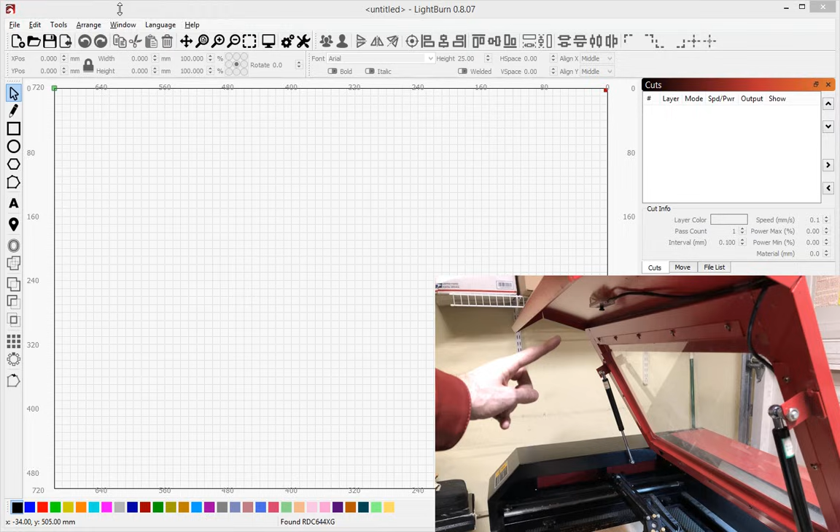So once you have a camera set up, connected, I have mine mounted on the inside of my laser, and I'll show a picture of that here. Go to Window and enable the camera control window, and you'll see it here. This is where it shows up by default, in behind your cut list. You can move this, that's fine.

If you click on camera here, you should be able to find the camera that you've mounted. Mine is called E2 camera. I'm going to pull this window out just to make this a little bit bigger so you can see it. This camera view is actually live right now. I can move my hand around underneath it.

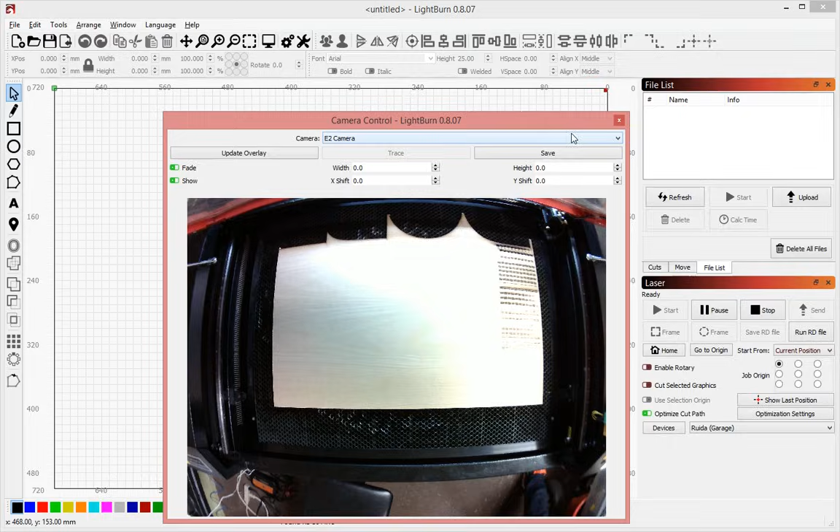So in order to get LightBurn to take this picture, which is fairly heavily fisheyed, and turn it into something useful, we have to do what's called lens calibration and alignment calibration. And those are the two things we're going to do next. So go to Tools, pick Calibrate Camera Lens, and you'll be presented with this window. Choose your camera, and you should see the view here.

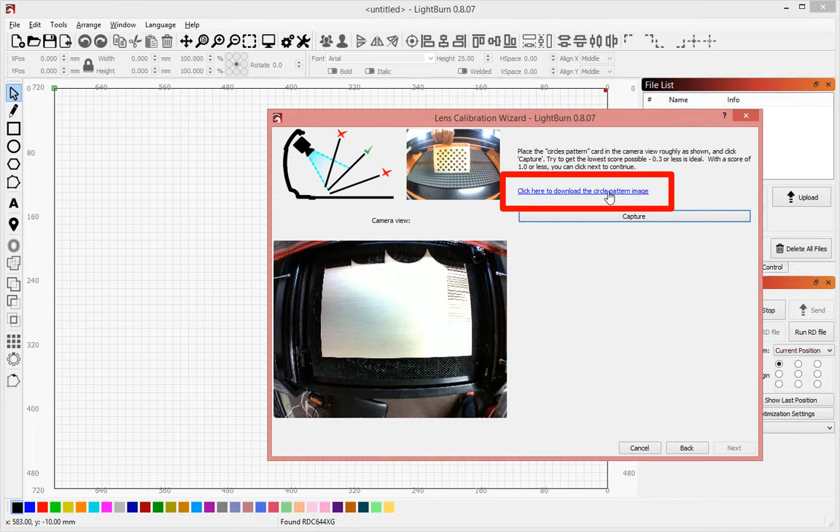This page is where we do the lens calibration, and you'll see a link here that says click here to download the circle pattern image. Now what this is talking about is this. This pattern is what LightBurn uses to measure the distortion of the lens of the camera.

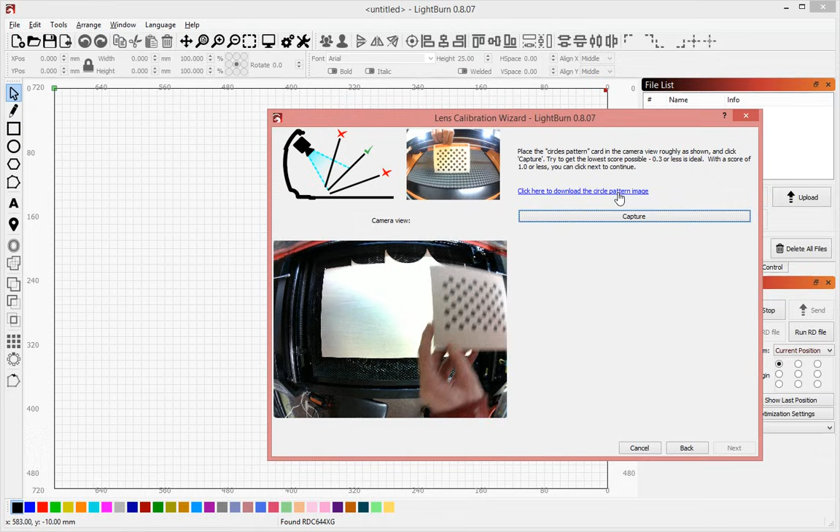And so you can see as I get close to the sides here, this warps a little bit. It looks pretty good in the middle, but on the edges you can see that the camera that I have right now is fairly heavily fisheyed. Some are worse. This is only a 140 degree lens. A 160, 170, or 180 are considerably worse, and they're going to be harder to calibrate, but it's still possible.

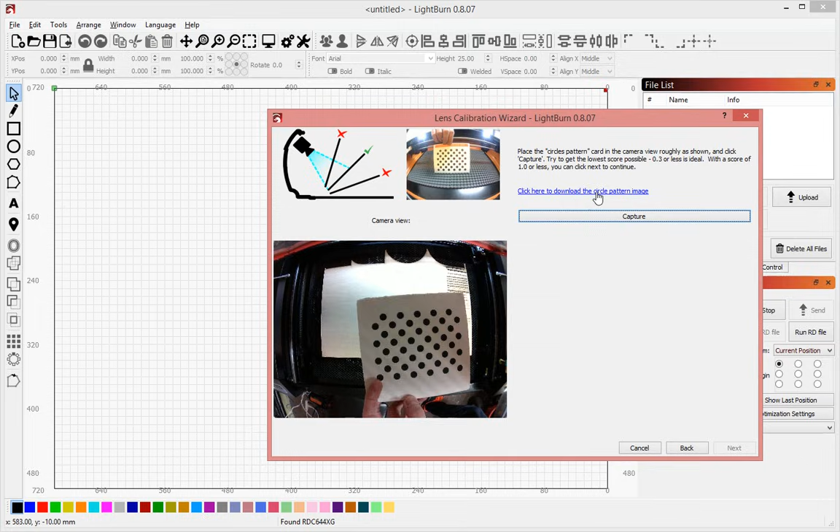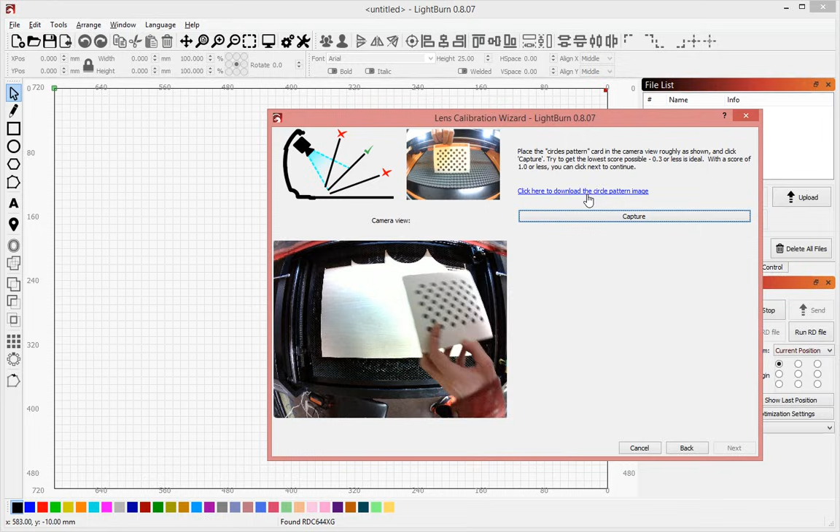With this card, you print it out at the size that the image is originally, so it works out to about 1/4 of a standard sheet of letter paper. I have this mounted on foam board, which is styrofoam core with paper on either side. You want this to be as absolutely flat as you possibly can. So I've just used glue stick to attach this to foam board. The flatter this is, the better your results.

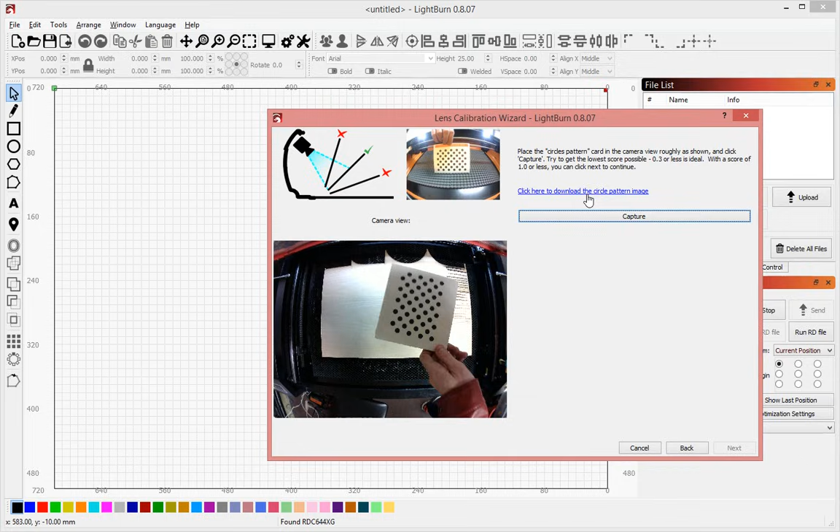If you have this image curved somewhat like this, instead of being nice and flat like this, the code in LightBurn that is trying to compensate for the distortion of the lens in the camera will instead be compensating for the distortion of your paper, and you don't want that. It's going to affect your results. So, short version, make sure that this is as flat as you can get it.

All right. The next part is up here in this window. You see this green checkmark, showing you that you should make sure that the card is absolutely facing the camera, not at an angle. So what that means is you want this card to directly face the camera, not be tilted slightly off to one side or the other, tilted away. You want it to directly face the camera.

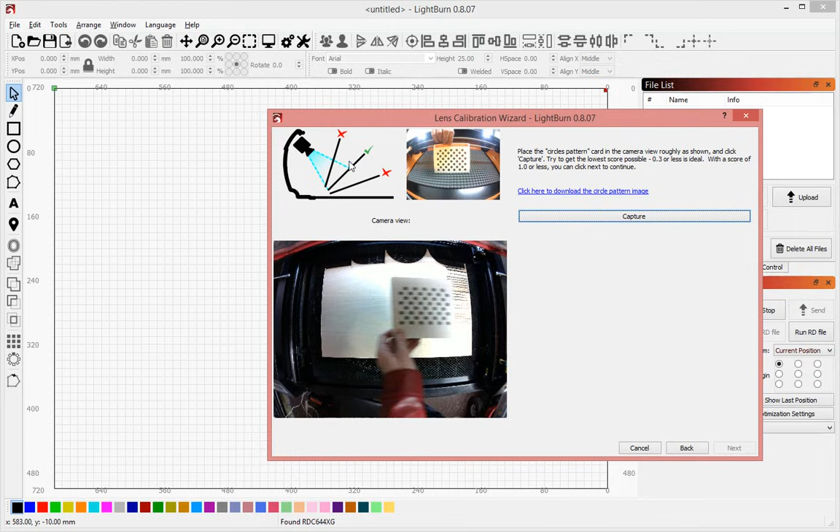And you want it to stay facing the camera as you move the image around. So you don't move the image in a circle like this around the camera. You move the image like this relative to the camera.

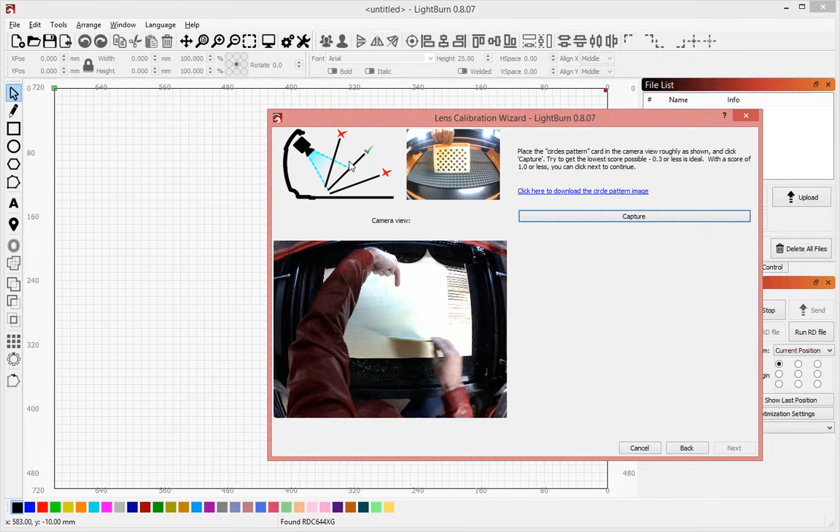So if the camera was over here looking this way, I would move this card back and forth like this. That's important. You want this card to point as flat at the camera as possible. You can angle it a little bit if that helps, and there are cases where it might, but again, as flat as possible is good. So let's get started.

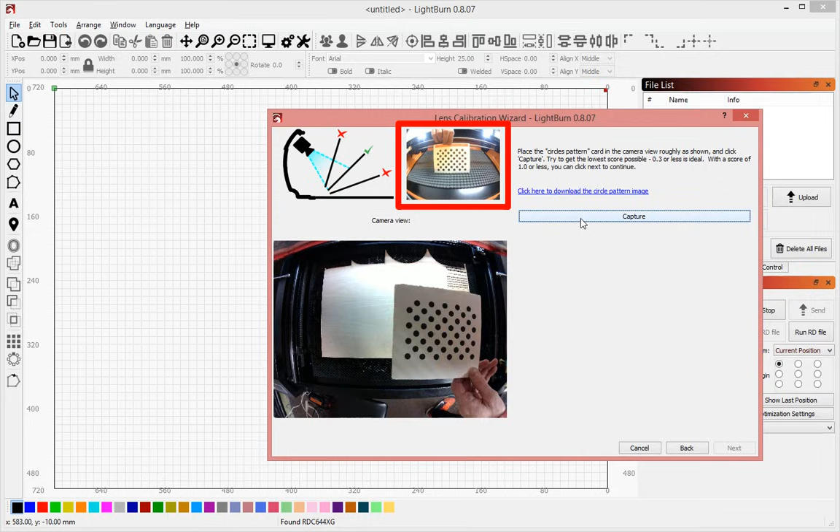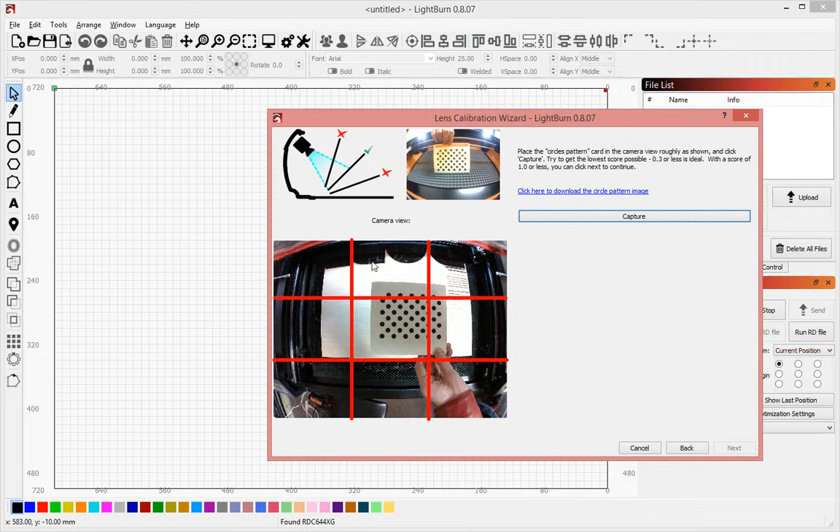This little view here shows you the ideal position for the card for this particular calibration image that we're taking. You're going to take 9 captures maximum. You can actually get away with doing fewer, and we'll talk about that when we get there. This image is showing you which capture LightBurn wants you to take. And basically what you're doing is putting the card so that it occupies roughly 1 square of a tic-tac-toe board, and you're going to do all 9 squares, if that makes sense.

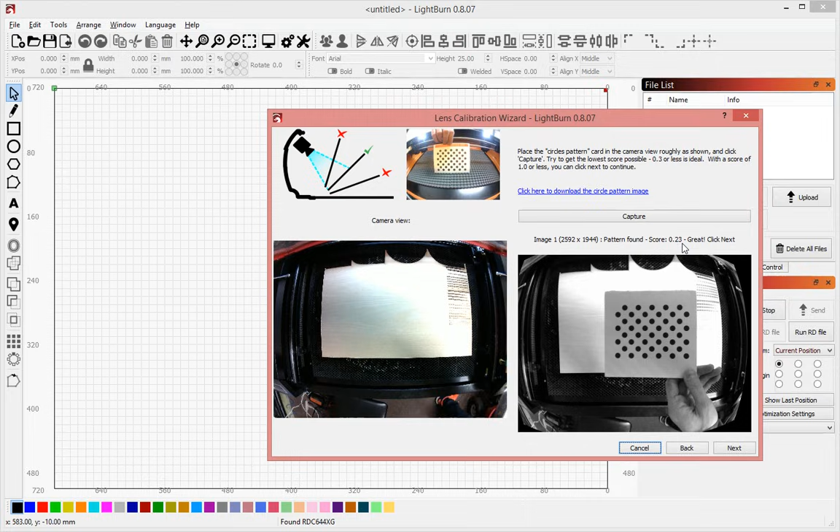So, hold the card as still as you can. If you can rest it on something, that's even better. Fill approximately the space that it looks like it's asking you for there, and hit capture. And you'll see pattern found and a score. Now this score, you should be trying to get it as low as you possibly can. It is possible to get numbers that are 0.06, 0.05. It's not easy, but it's doable.

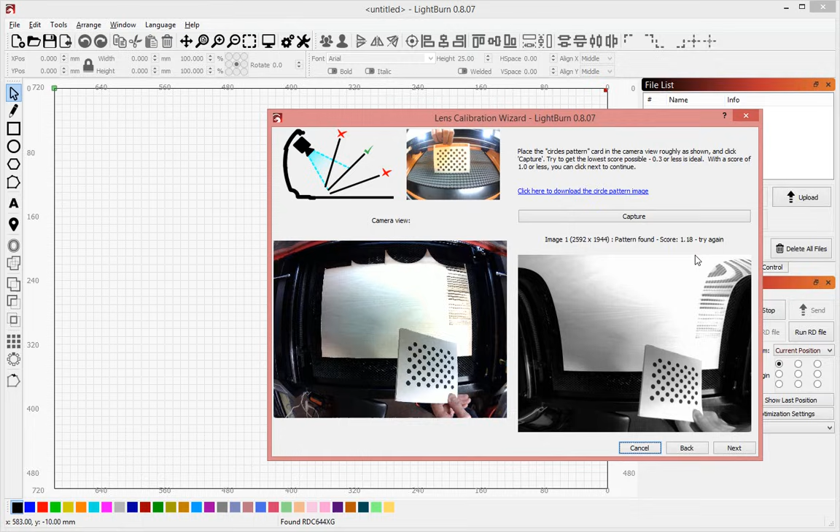And you'll see you can recapture here. There's 0.12, that's actually pretty good. If I tilt this funny, hold it a little weird, you see that number goes up quite a bit. If it's really crap and off the boundary here, you'll see, hey, I found the pattern, but it gives me a pretty bad score. So hold it where it's asking, hold it as still as you can. That one's not bad. Lighting is also important, and my lighting here is kind of crap, and I apologize for that. There we go. So 0.13, that's great.

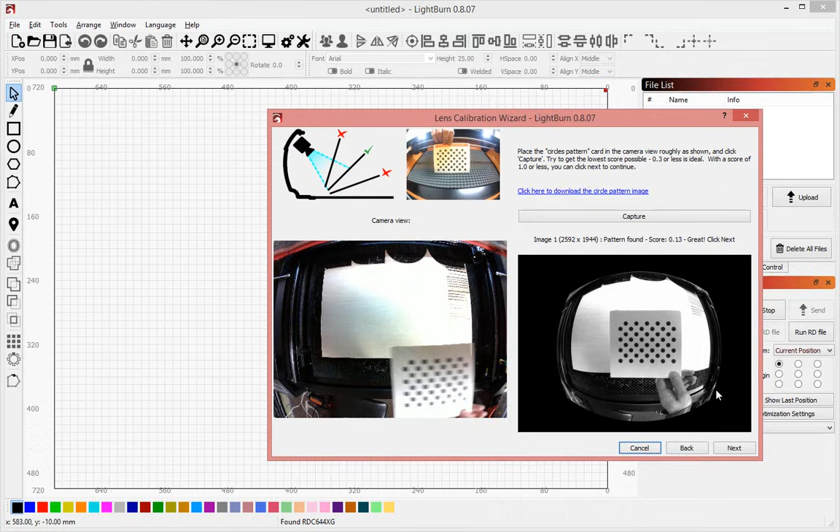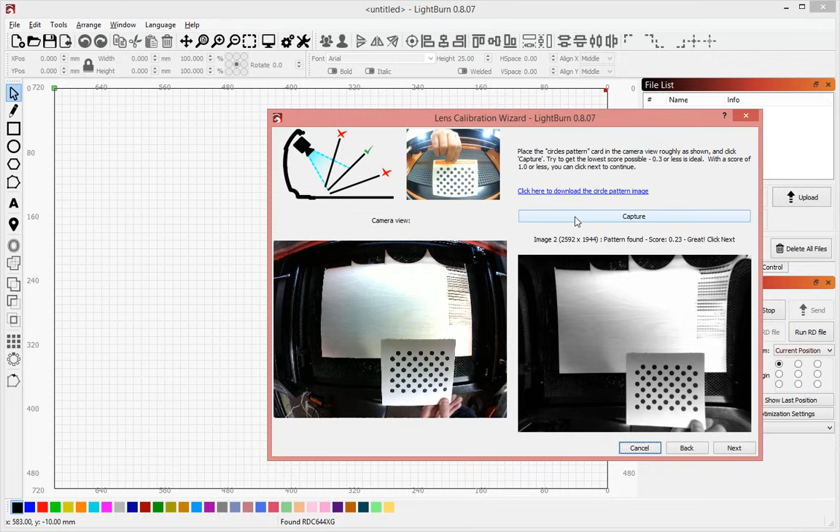So click next. Now it's saying bottom edge. So we're going to do basically the same thing that we did before. Hold the card nice and flat, roughly the size that it looks in that picture, and hit capture. 0.23 is actually not a bad score. I'm going to try and get it a little lower. You can also move the image around a little bit within the frame. Sometimes that helps. 0.16, I'm pretty happy with that, so we'll click next.

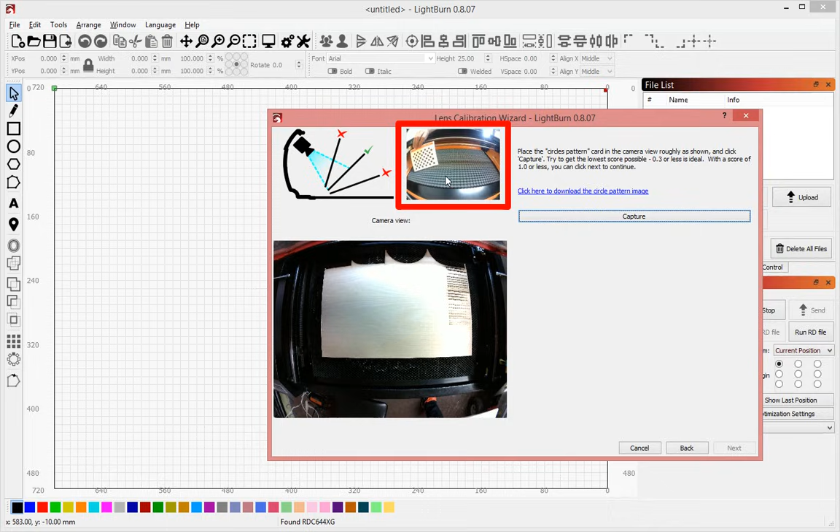This one, don't let the image fool you. The picture in this is quite distorted because this sample image was from a 160 or 170 degree lens, but really what LightBurn is asking for is this picture over here. It's not bad. I think we can do better. I'm reasonably happy with that. We'll move on to the next one.

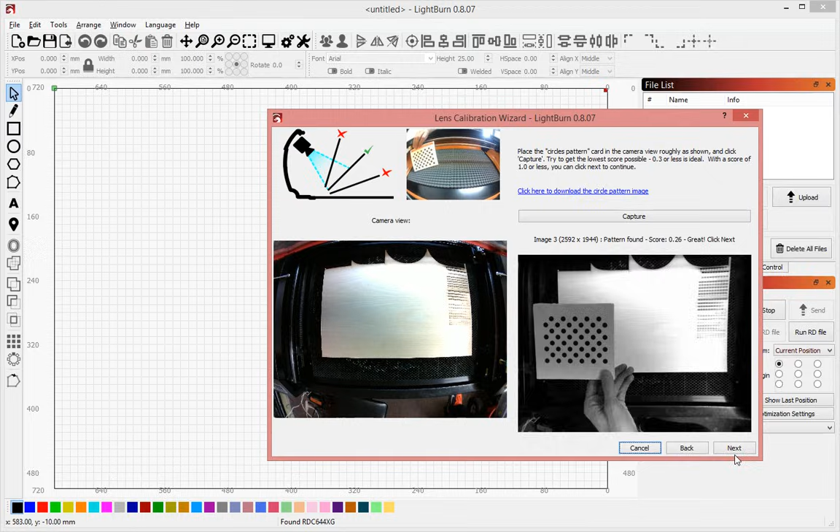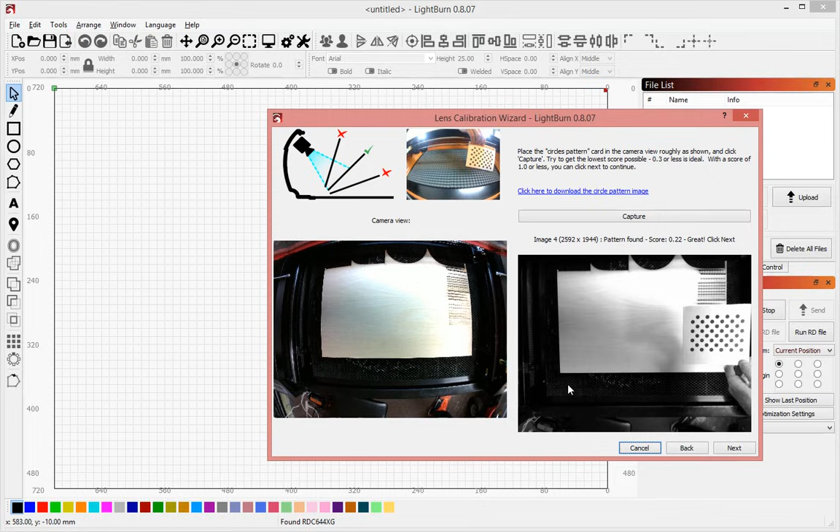On the next side, lighting over here is a little better, so this one might improve. That's pretty good. When you take your first capture, you might have noticed that when I did it, the image here looked really weird and round and warped. Don't worry about it, it corrects as you go. So this one up here, that's a great score, so I'm happy with that.

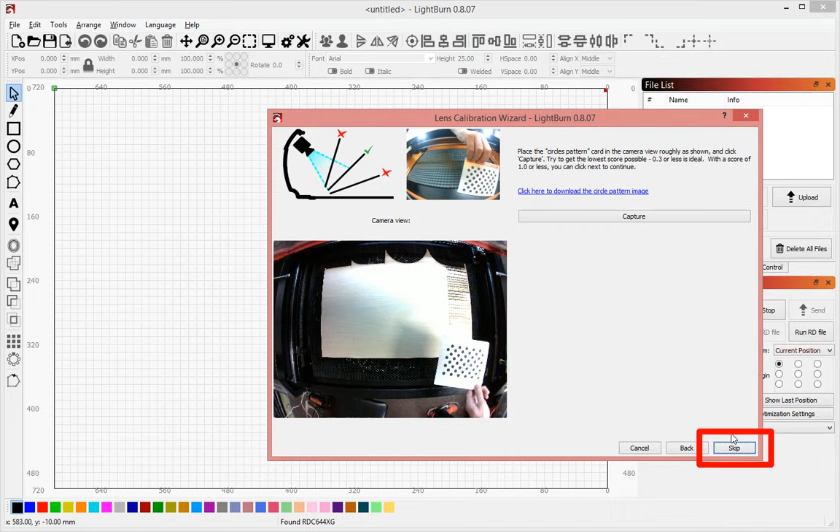Now, because I have done well and gotten good scores for the captures up to this point, for the center, the bottom and top, and the 2 sides, I have the option to skip the 4 corners because my captures have been really good. So I can either click the skip button, or I can go through and capture images for these ones as well. I'm going to do at least one. 0.21, that's a good one.

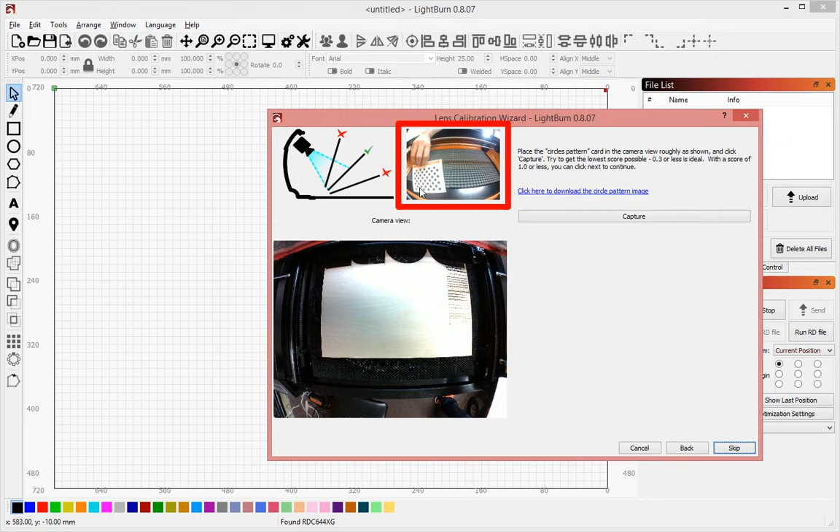Click next. It's also worth noting that LightBurn doesn't check which picture you gave it. So I just did the corner down here. I'm going to skip this one and go to the next one over here. And you'll notice it's asking me for this bottom corner. I'm just going to do this one up here. That's great. I can click next, and I'm going to skip the next 2.

So we've done the camera lens calibration, and now the next step is the camera alignment. Now for that, you need a piece of material. I have a fairly crappy piece of wood that I've placed in my machine, roughly centered in the view of the camera.

If you have a large bed, try to get a piece of material that is large enough to cover a fairly wide area. The default for this test pattern cut is, as you'll see here, 200 millimeters square, or an 8-inch square. That's great if you have a little K40 or something like that, but if you have a large machine, you should use the scale factor here to scale this image up to fill more of your bed, because it'll give you better accuracy. It'll give you a much better result. So I am going to bump this up to 170.

If you have a movable Z, you may want to set the material thickness. This will shift the bed a little bit. Most of the time you don't need to do this. Choose an appropriate speed and power for the machine that you're using. This is going to do essentially a surface engraving, and so I want to use a fairly low power and a relatively high speed because I have a 100 watt CO2 machine. Your numbers will be different than mine. I'm also going to enable air assist.

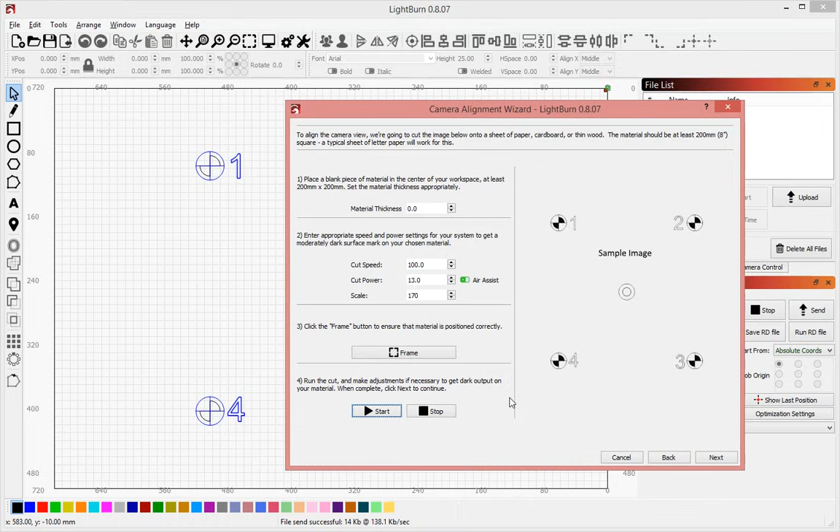So once you've done your cut and you're happy with the result, be very careful. Do not move either the camera or the targets from this point on. Your camera should be mounted to the laser in such a way that the position when you are using the camera for bed capture is always in the same place. If your lid wobbles or doesn't have hard stops, that may be a problem. It will cause your camera position to shift slightly, and that's going to affect the accuracy of your results, so do be aware of that. I'm happy with the output here, so I click next.

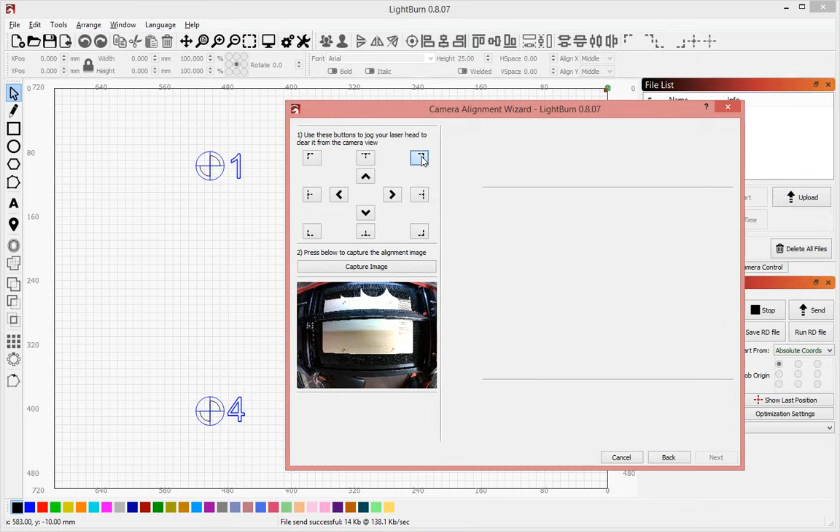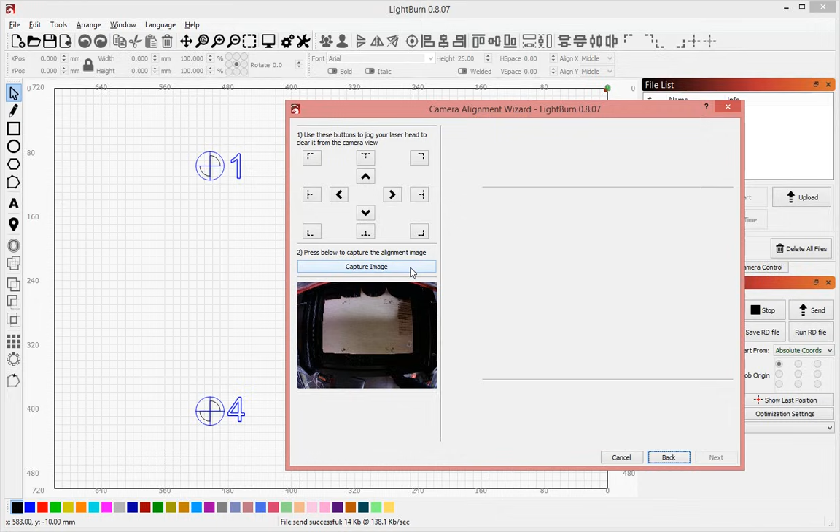Now you can see a crappy picture of the bed here. If you need to move the head of your laser out of the way, for example, if mine finished here, that's going to make it difficult for me to mark the targets, so you can use these buttons to jog or move your laser to one of the corners. When you're happy with the image that you see here, click capture and you'll see a preview of it over here. I'm happy with this, I'll click next. So now I'm going to use this view to mark these targets, and you can see that they are numbered. The lighting here is a little terrible, so I may need to do this again. That's much better.

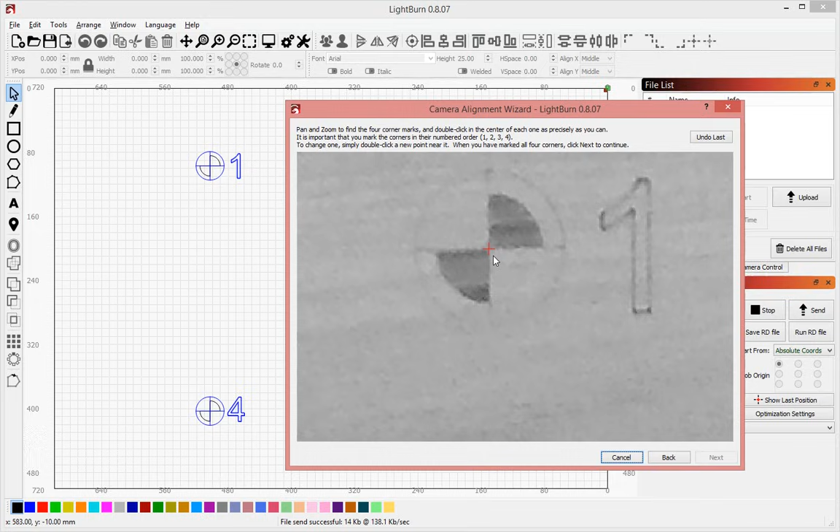So what you're doing in this view is, just like the preview in LightBurn, you can use click to drag or mouse wheel to zoom in and out. You want to mark these targets with a little crosshair. So you're telling LightBurn where each of these marks is in the camera view in numbered order. So be as accurate as you can be. You want to hit as close to dead center as you absolutely can on each of these marks. And you can zoom out to check. So that one's good.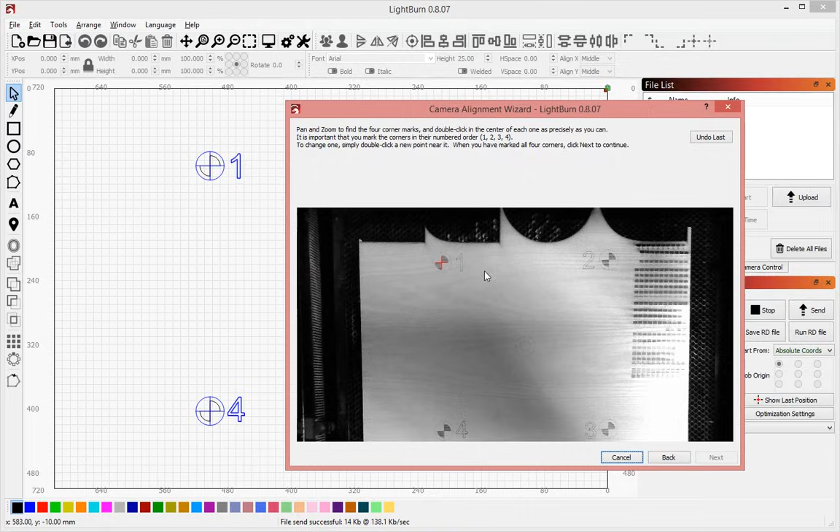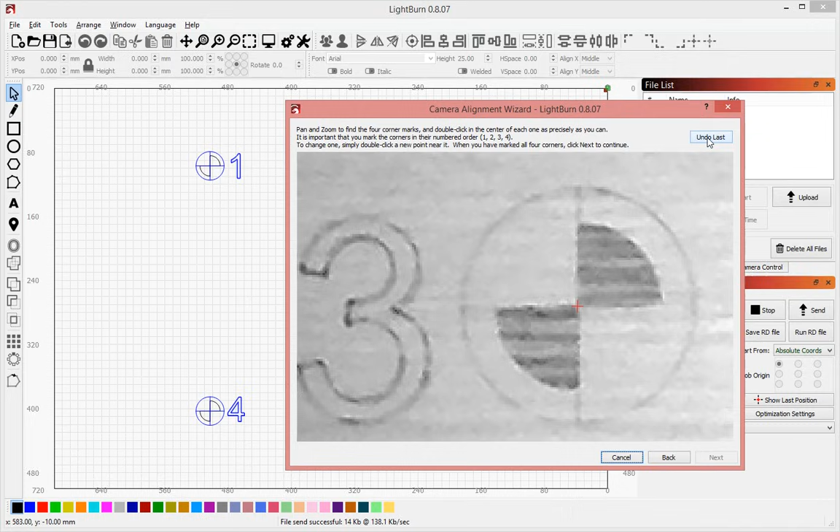And again, be careful and take your time, because the more accurate you do this, the better your results are going to be when you are trying to use the camera. If you need to reposition a mark, if you're close to it already, double-clicking near it will move that mark. And if you really mess up, you can just click undo last and it will remove the mark completely.

I think those are about as good as I'm going to get. Maybe move that one just a touch. When you're happy with your 4 marks, click Next and click Finish.

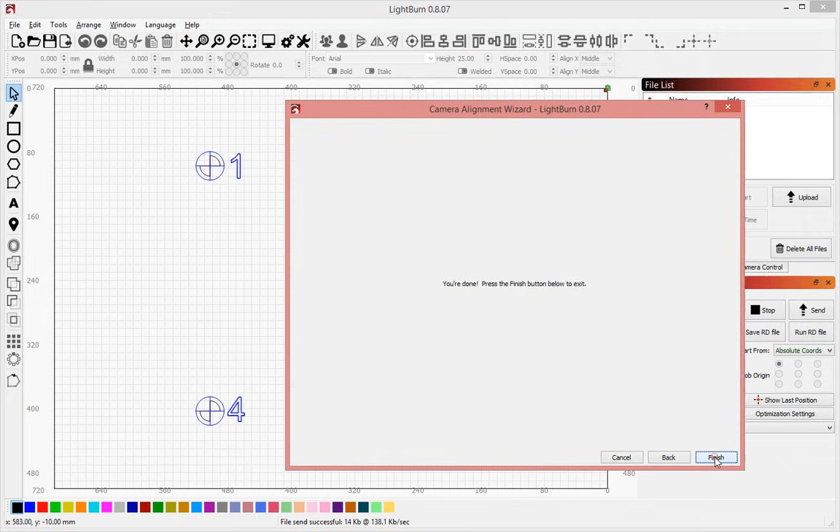If you go back now to the camera control view, so I have done the lens calibration, I've done the camera alignment. If I click Update Overlay, I now see an image from the camera projected onto the backdrop of my page here. And these marks are accurate, or should be.

If I click the click to jog and zoom in here to marker number 1 and move my laser head to there, you can see in this view the laser moved to that marker. If I look at my laser right now, or take a picture of it, the laser head is exactly in the center of that mark.

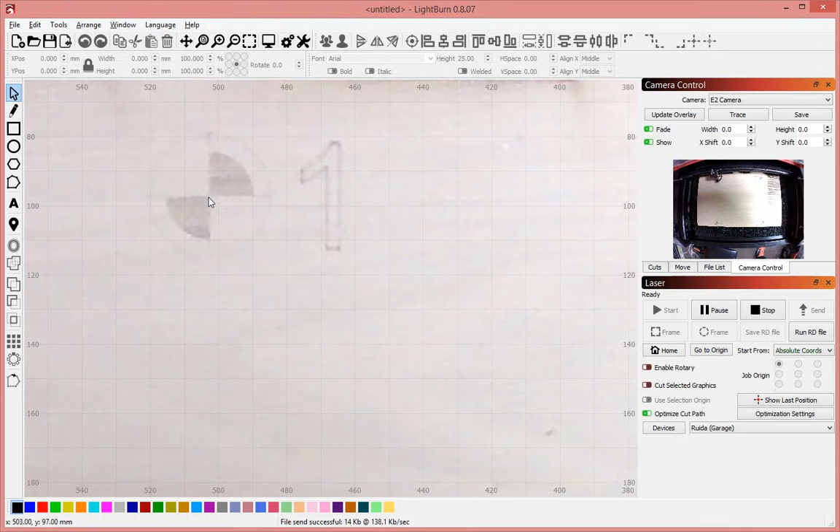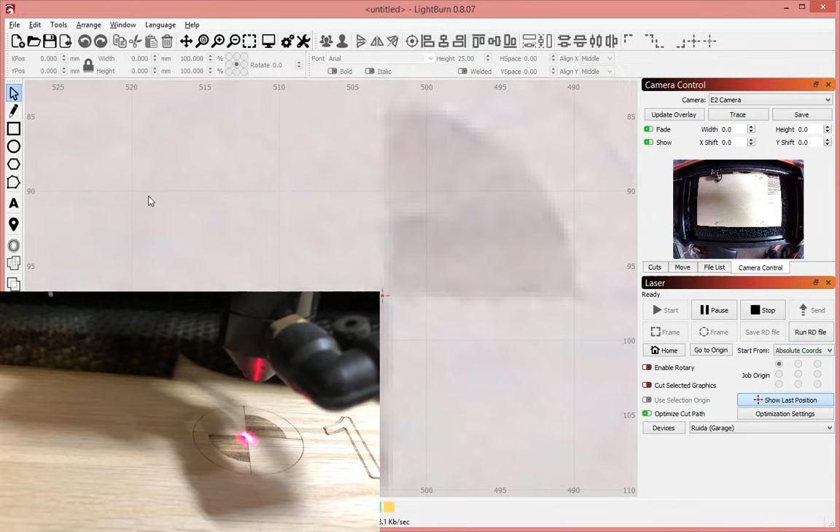So if I click show last position, let's move this to right. Okay, that's as close as it's going to get just because I've told it to snap 2 millimeters. I am going to take a picture of this right now to show you where my laser is pointing. So you'll be able to see it. Again, if I click one of the other targets, like number 3, it's basically perfect. So that's good.

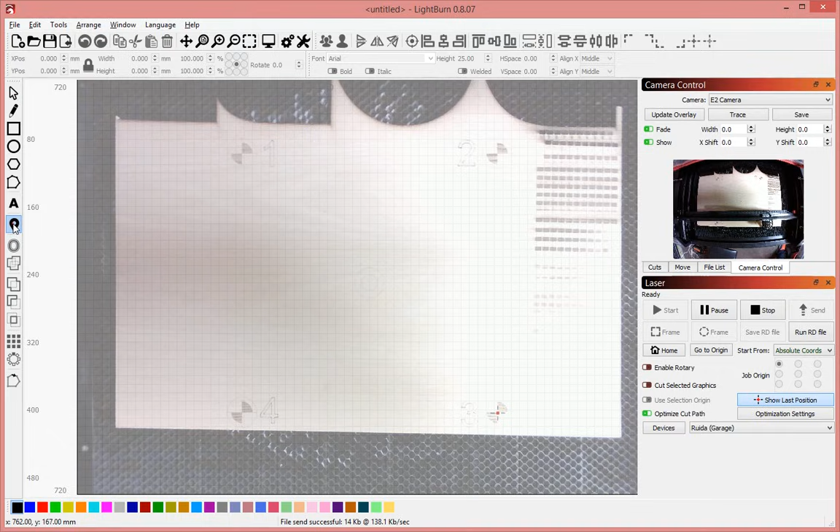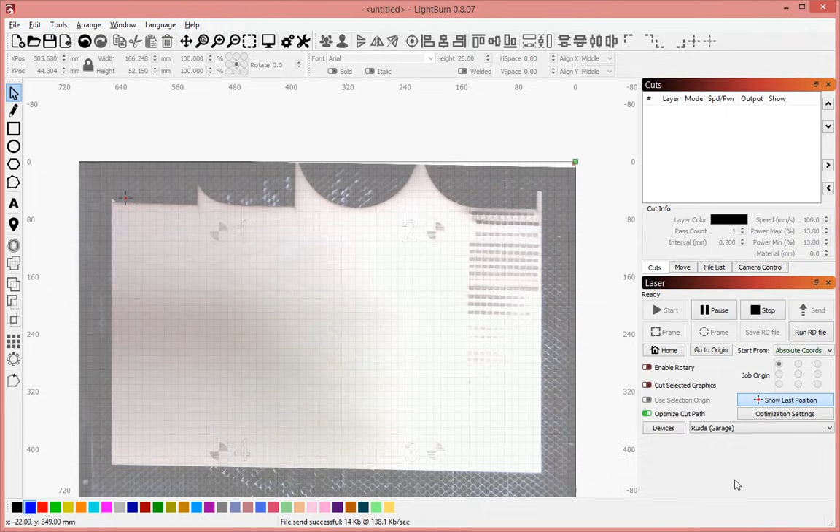So, what do you use it for? The short answer is you use this to line up work on your machine. So if I have an odd-shaped piece of material, like I do here, for example, and I want to do a cut that matches this very, very precisely, I'm going to try to put a circle or an arc right here around this. So I'm going to put a point here, I'm going to put a point there, I'm going to put a point there. I have this turned off, that's why they're not showing up.

So I'm going to go into edit mode, smooth that point. Try to make this fit nice and close to this circle, or to this curve. Alright, so it's not beautiful, but it'll get the point across. Basically what I'm going to try to do is cut a line right on the outside edge of that, just to demonstrate how close you can get with this. So I'm going to run this.

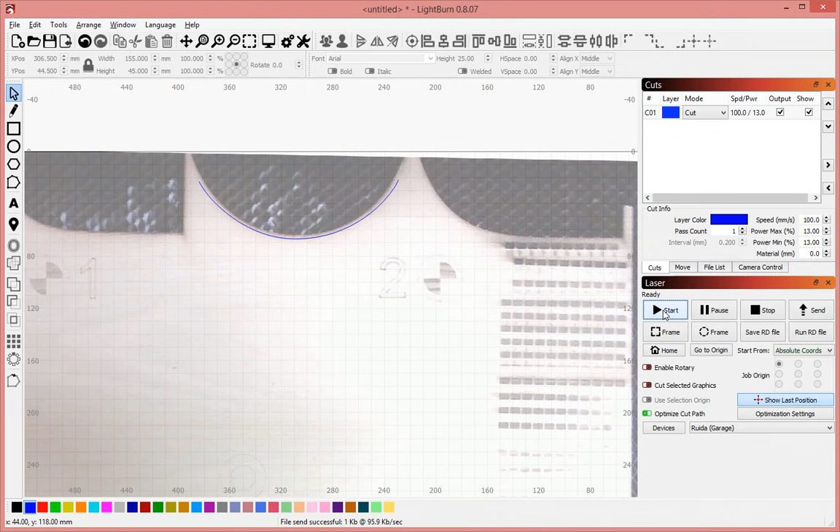And I'm going to take a picture so I can show you where that ended up. And I'm also going to go back to the camera control view, jog my laser head out of the way, and click Update Overlay. Turn my light off again because that's too bright.

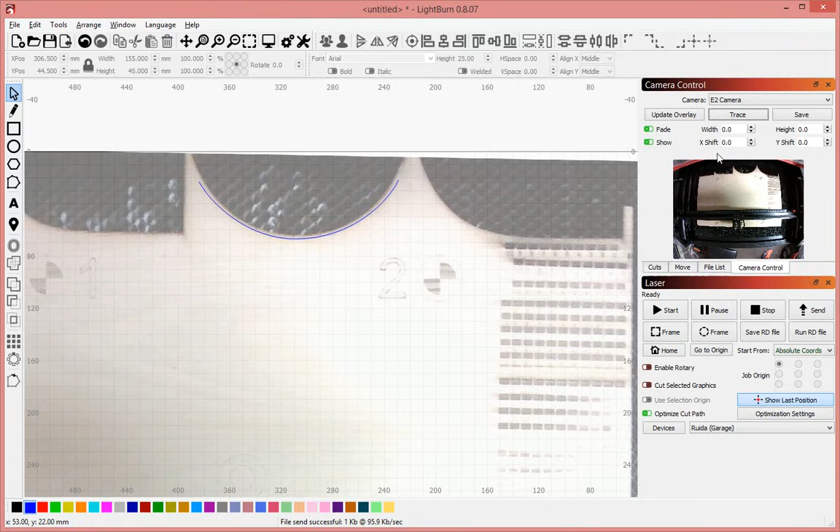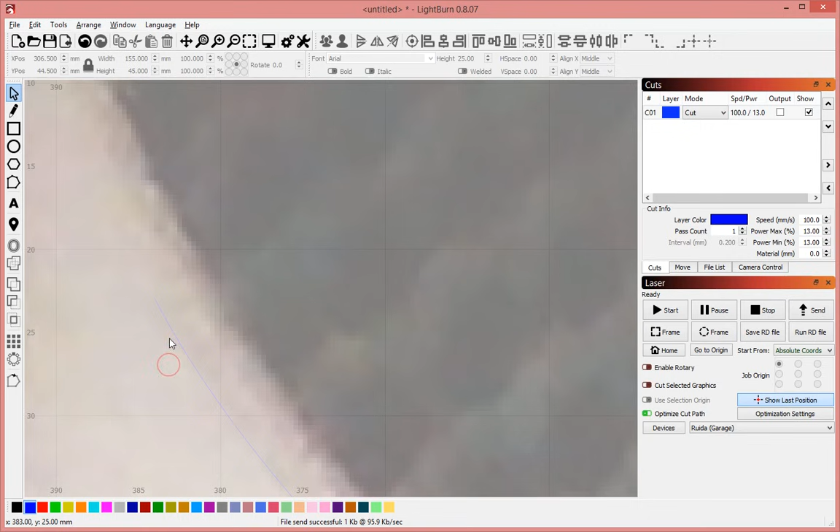There we go. If I go back to my cut list and hide this, you can actually see that line right there. It's a little bit out of focus, but that is that line. And if I turn it back on, that's how close we are. So the accuracy is honestly very good.

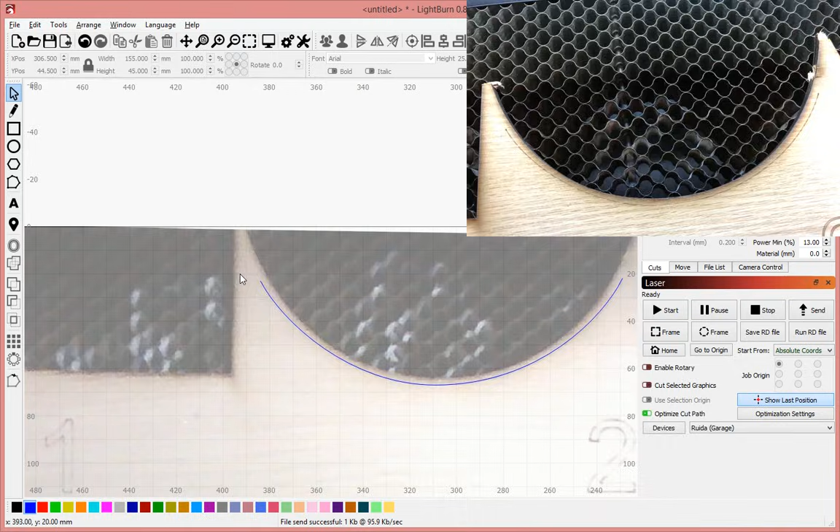If I toggle it off and on, you can actually see this line here and the line in LightBurn that matches it. The camera image is actually a little bit blurrier, but in real life it's very, very close. So you could use this to place anything on the bed of the laser and perform a cut.

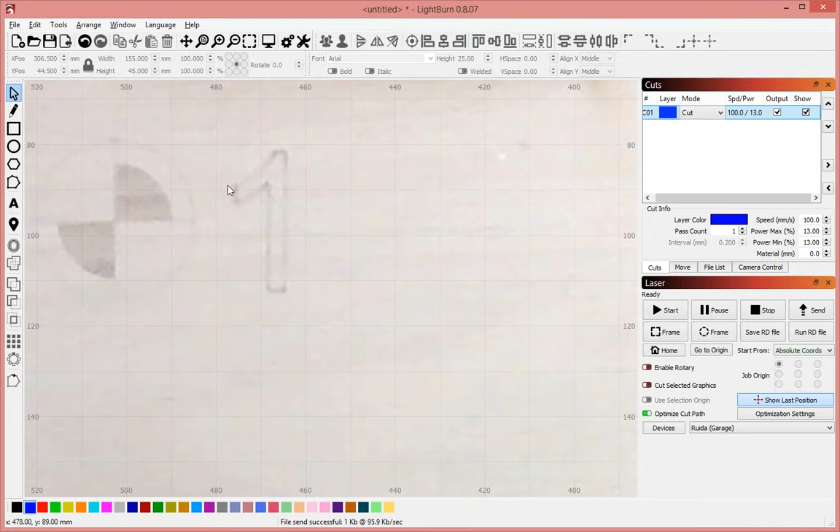So as an example, if I wanted to outline this one with a box, if I draw a box around it, just like this, tell it to cut, make sure that I have removed the other line here, close my lid and click start.

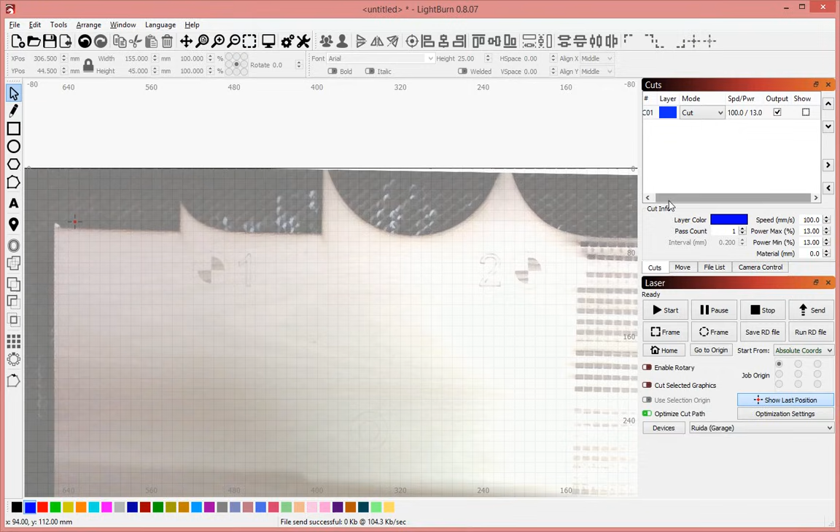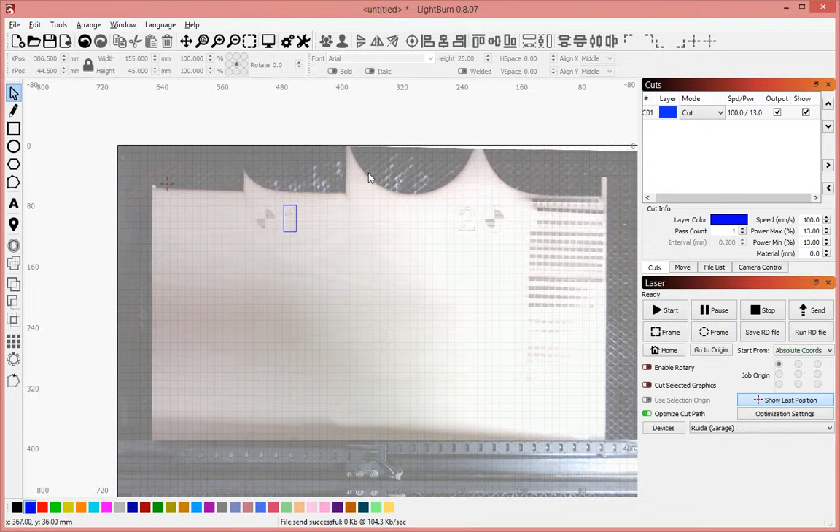I'm going to hide that, and if I update the overlay, you can actually see the box that I just cut is right there, and the one in LightBurn is right on top of it. And so this opens up the ability to cut or mark irregular items, strange shapes, fit cuts onto oddly shaped materials like this, and so on. And that is the entire point of using a camera with LightBurn.